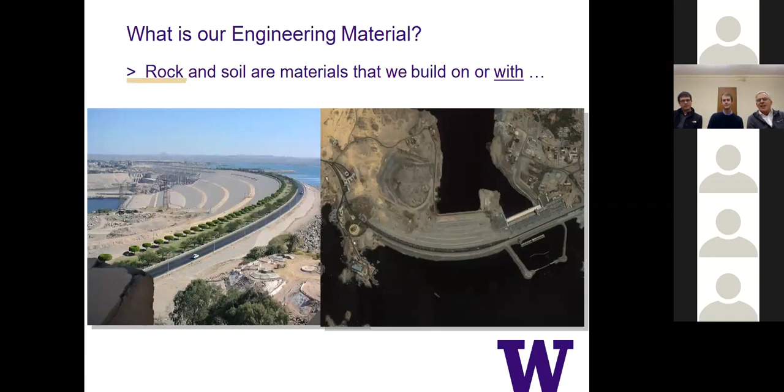So the first thing is to understand what type of material we are dealing with. And the material that we deal with is rock and soils. And these are materials we build on or we build with. So here you're seeing a picture of a dam. This is an engineered dam that is made of soil. And that soil has to be engineered. Here you have a top view of the same dam. So you cannot dump the soil there without looking at the properties, checking the engineering properties the same way that you do with concrete design or steel design or wood design. This is just another material that you have to work with.

So we measured a lot of the properties, and actually some of Mike Gomez and Brent Norton, they have a lot of experience getting the strength of the material, the elastic properties, the permeability, the compressibility. So we have a lot of equipment that is used for this purpose. A lot of that is very advanced, and we have them available here at UW.

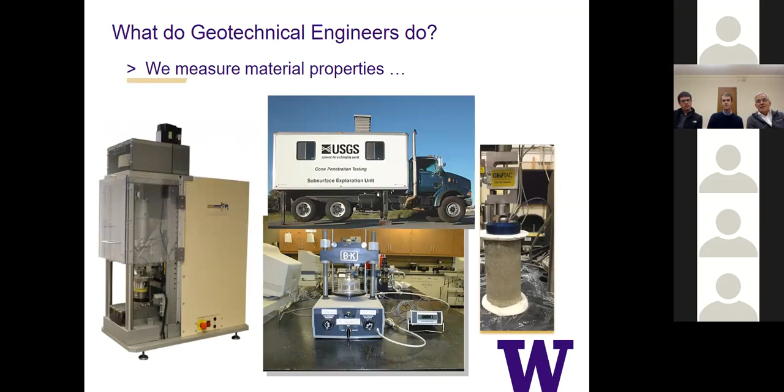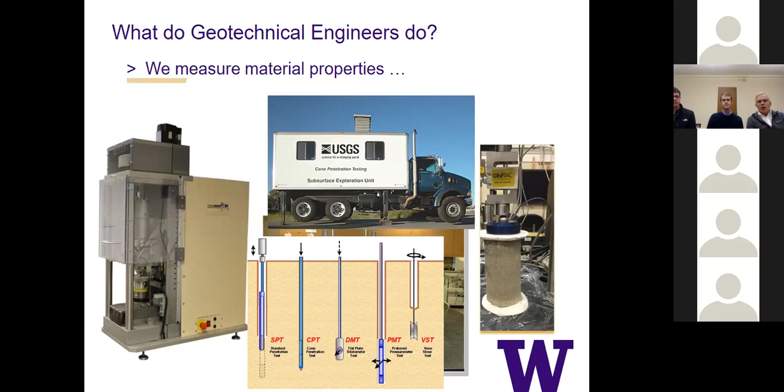Also, you do field tests. Sometimes you cannot bring samples to the lab. So what you do is to go to the field and you perform tests in the field. And there is a whole variety of tests in the field that they run, what is called SPT, dilatometer, cone penetration test, pressuremeter test, vane shear test. A lot of tests that you perform in the field in order to estimate the properties directly there on site. And we have a lot of experience on that too. In particular, Professor Bob Holtz was an expert on some of these methods.

We evaluate the stability of slopes. It's very common to have the need to build a slope or to put a structure on top of a slope, either because visually it's better, you get a better view of the sound, or sometimes because you are making a cut and you have to build near some of these very high slopes. So how to evaluate the stability of these? You may have problems.

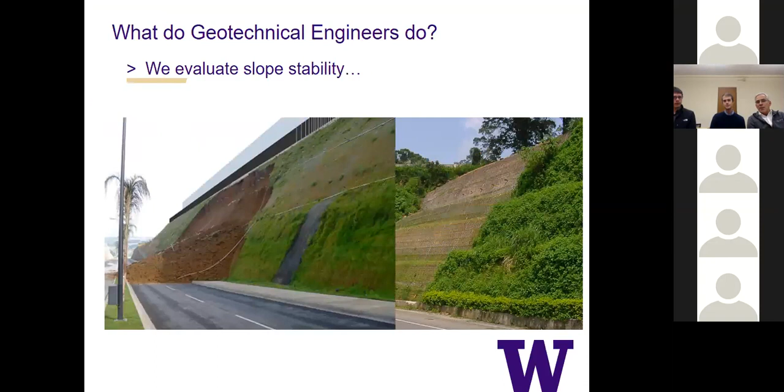Sometimes they are small, but sometimes they are very large, like in the case of the Oso landslide a couple of years ago that resulted in the loss of many lives, in addition to all the economical losses. So how to evaluate these so that we don't have this type of problems is something that we do in our field.

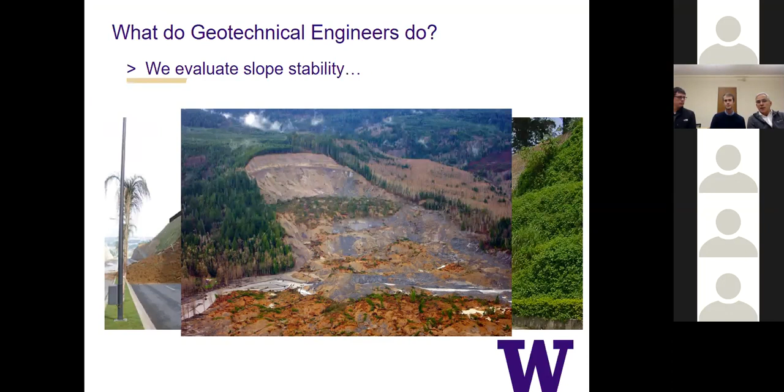What else? We also evaluate hazards, in particular in this area, earthquake hazards. We live on top of a very thin layer of soil, and underneath that layer there is a rock. So waves that come from an earthquake, they propagate through that soil, and usually that little layer of soil acts like a huge amplifier or de-amplifier or modifier of the motion. So it's very important to understand what the soil is going to do to the waves that are traveling there. And that's something that we do.

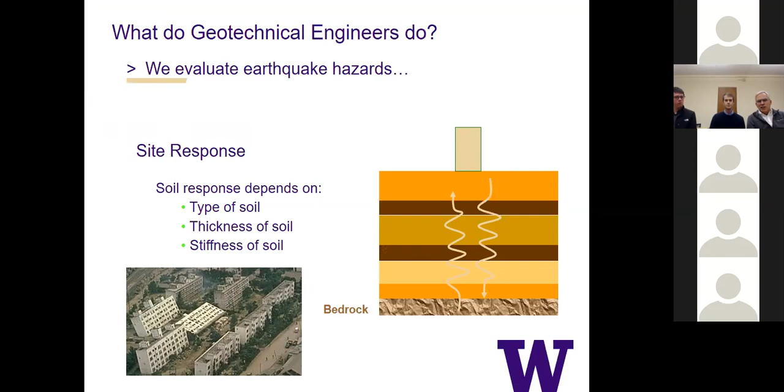So site response depends on the type of soil, the thickness of the soil, the stiffness of the soil. And these are all things that we do. If we don't take care of this, we can have problems like this one, where this seems to be a structural problem, but if you look more in detail at these buildings that are tilted, you will notice that structurally they are in great shape. The problem is that the soil failed beneath them. And because of that, they had to be completely demolished. Fortunately, in this case, there were not many lives lost. This was in Japan, in Niigata, in 1964.

A lot of the things that we do is to conduct reconnaissance activities to learn from recent disasters. And we have had several of those in the last couple of months, actually. So we have people that go to these places, they collect information, and we try to learn from these problems so that these things don't happen again.

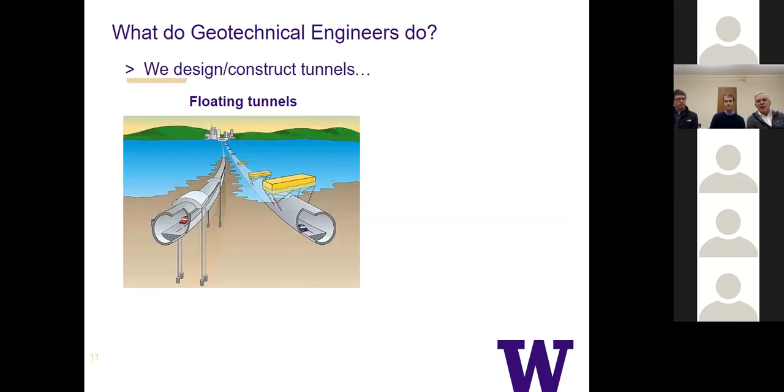But the important thing here is that either the floating bridge or the tunnel has to be restrained at the bottom with some anchors. And that's a geotechnical problem. And that's the difficult part, to make sure that these restraints are in good shape for the next 20 or 30 years.

Tunnels are usually in soils, and actually, I don't know if you know, but one of the first tunnels in soils was built here in Seattle, actually crossing for the I-90 highway when it was getting to Seattle. Since then, we have done a ton of these tunnels in soils. That's the difficult part. How to do that without the soil collapsing on you?

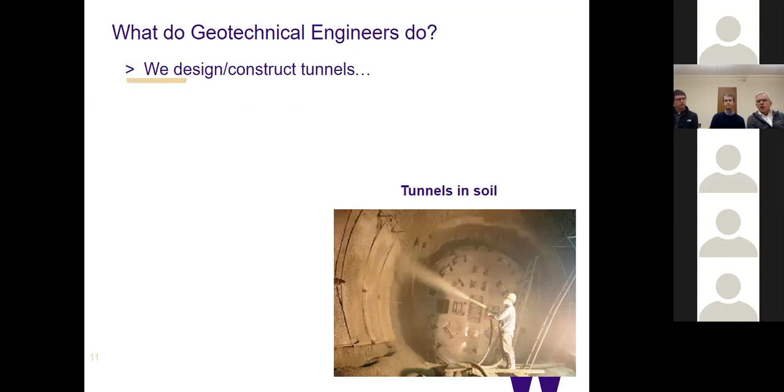And if you go from the 1960s to today, this is a picture of the SR-99. This is Bertha, the TBM machine that was used in order to build the tunnel that's going to be open next year, I think in February. Again, the largest tunnel in soil in the world for the time. It was in 1960, it's again here in 2018. So we do the design of that.

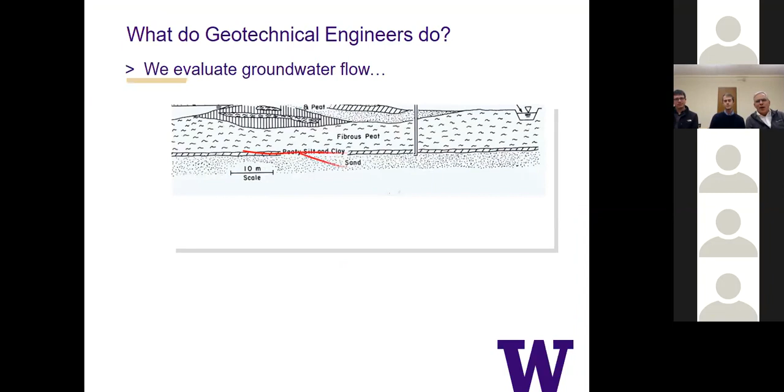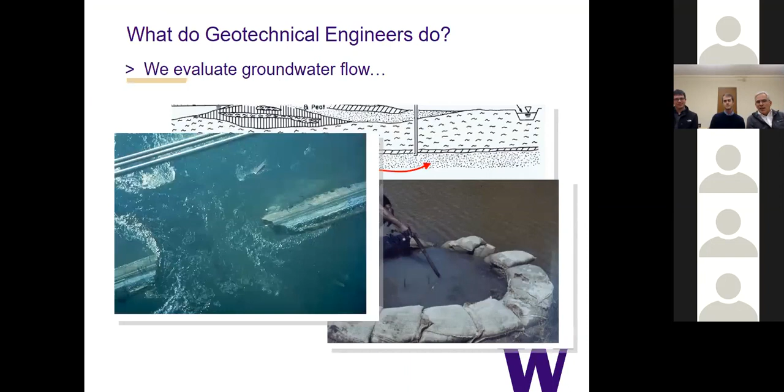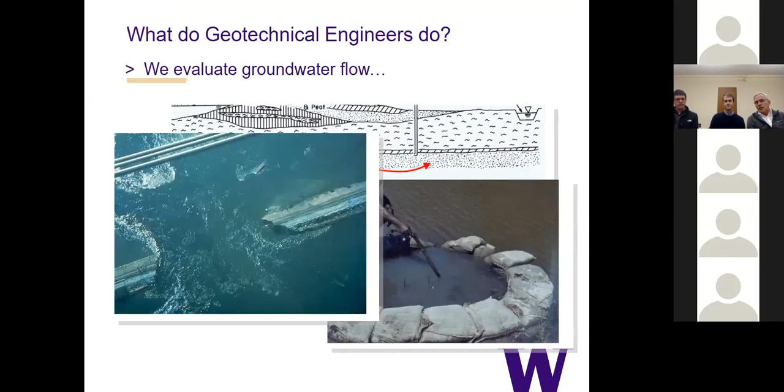We evaluate groundwater flow, how the water flows through soils. And that seems to be kind of like in this picture, like an agricultural problem. But in reality, if you don't take care of how the water flows through the soil, then you may have problems like the breaching of the levees in New Orleans a couple of years ago that resulted in the loss of many lives and economic losses, as you may know.

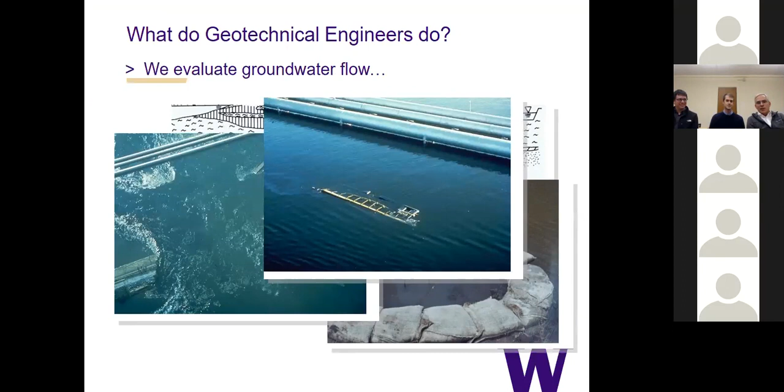Is this a geotechnical problem? It's an interdisciplinary problem between the hydraulics people, the geotechnical people, and the structural people, and social problems, because why do we put these things there? Do we need to put a city in a place that is underneath the water? So it's a very interdisciplinary problem where we all play an important role, including geotechnical engineering.

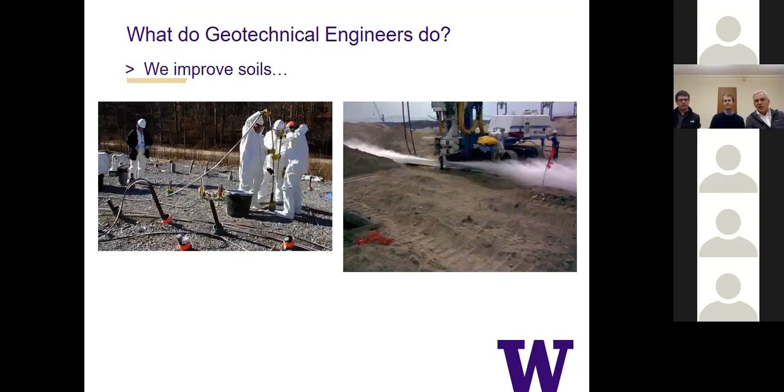And actually, next to me is Michael Gomez. He's an expert on that, and that's why we are very happy to have him here in the group. This is soil mixing. Soil mixing, so you mix cement with the soil cuttings and you end up with a slurry that is much stronger than just having the soil there.

And this one, what would you want to say with this one? The idea is that increasingly we're looking at the impacts of different soil techniques. And recently we've come to realize that we can use chemical and biological reactions in the soil. The new generation of ground improvement is trying to look at how we can use microorganisms or chemical reactions to help us do that.

And one of the things we're looking at is actually using bacteria to do some of this soil improvement for us. So it's an interdisciplinary linkage between geotechnical engineering, microbiology, and also looking now more towards biogeochemistry and these sorts of things. So it's an exciting time.

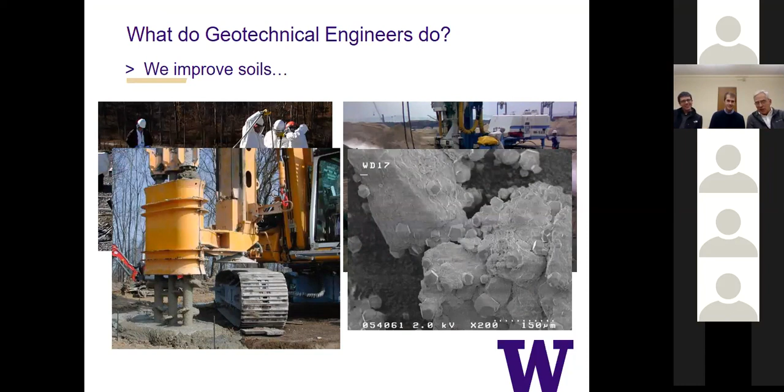Yeah, again, we have to get out of these silos that are just soil mechanics. It becomes interdisciplinary. So we need to do chemistry for this type of problem. We need to do biology here. We need to understand how these bugs grow and move around, how to control them, how to tell them go here or there, poop here or poop there, because that's what they really do. And that's really an interdisciplinary problem. So again, more on the tunneling.

Lately, we have seen several activities related to tunnels. One of those was next here to the light rail, with the tunnels that go to downtown Seattle. Next year, we are going to open another part of the tunnel that goes all the way to the north. We are crossing also to the east side. So we are going to see tunneling much more in the next couple of years.

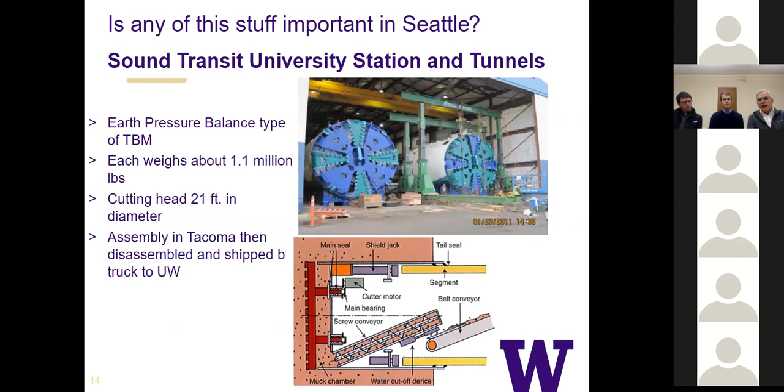And the technology that we use for tunneling is complex. It involves understanding a lot how the soil that you are cutting behaves, in addition to understanding everything else. It's a structural problem too, and it's a construction management problem too.

And this is a picture from a couple of years ago for the tunnel in the light rail station here at UW, next to the Husky Stadium. And that's how the construction site used to look. Now everything is covered, you don't see anything, but below there is a big hole that needed to be done in order to build this.

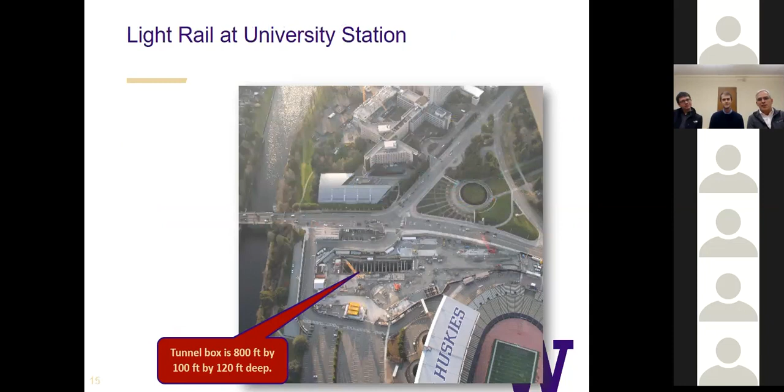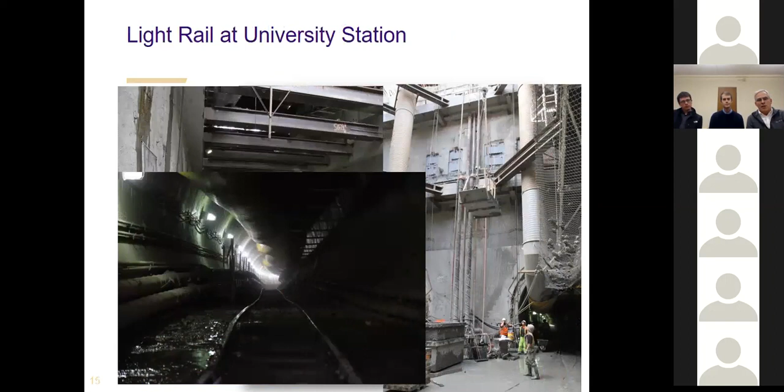This is another picture of the same construction site for the UW station. Here you see the walls on that excavation. These walls had to be heavily reinforced so that the soil doesn't collapse on top of you. And believe me, the loads that come from the soil are huge, are tremendous. So these are very strong walls. And this is the inside of the tunnel when they were building this with a tunnel boring machine, or TBM as it is known.

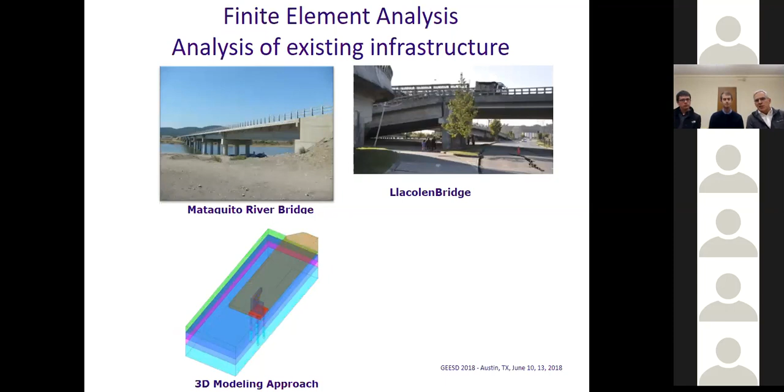We also do a lot of simulations because sometimes we have structures like this bridge, and then we say, well, what would happen if this bridge is subject to an earthquake? We don't know if the earthquake will happen there. So we have to start doing modeling. We do finite element models. And these finite element models are three-dimensional. They include not just the soil, but you have to start modeling the abutments, the embankments, the piles, the interaction between the piles and the soil. So the numerical component of this becomes very heavy. And again, very interdisciplinary between geotech and the structural people and the mechanics people, and of course, all the numerical people.

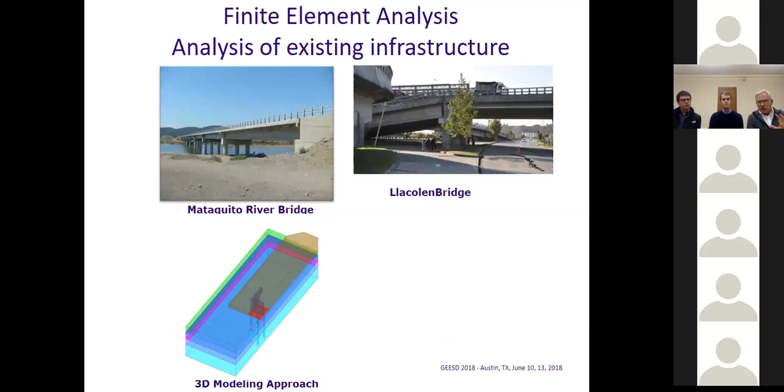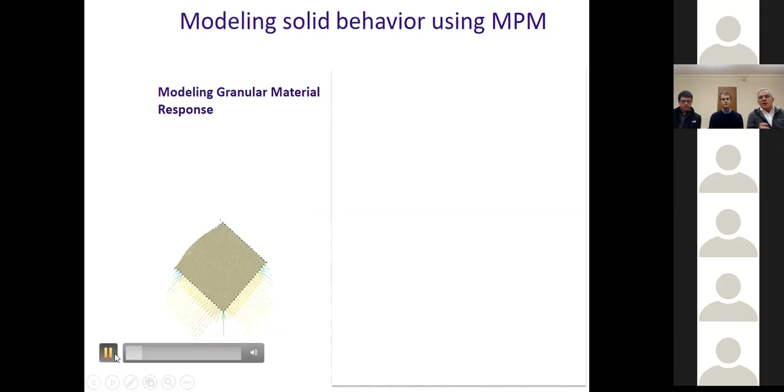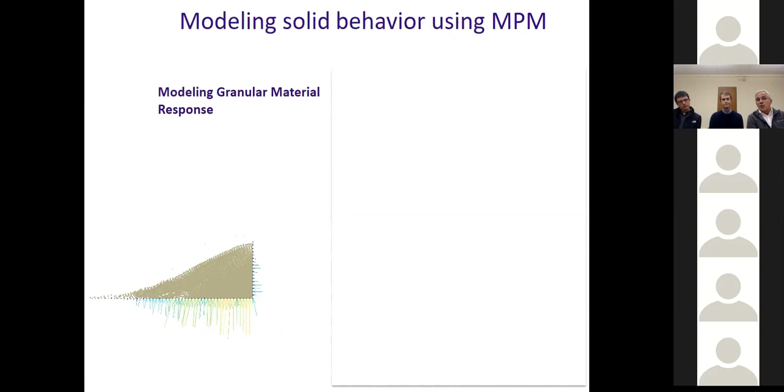This is another case of a bridge in Chile that collapsed. And again, we did the whole analysis of this bridge, including the foundation, the piles, so that we can understand better what happens. So what I'm trying to say is numerical modeling is a very important component of what we do. It can become difficult, for example, when you are doing a very simple analysis of a bucket of soil that you are trying to turn, how to model that the soil is moving like that. This is not a simple analysis, it's numerical analysis, how to do that in the proper way so that you get realistic and accurate numbers.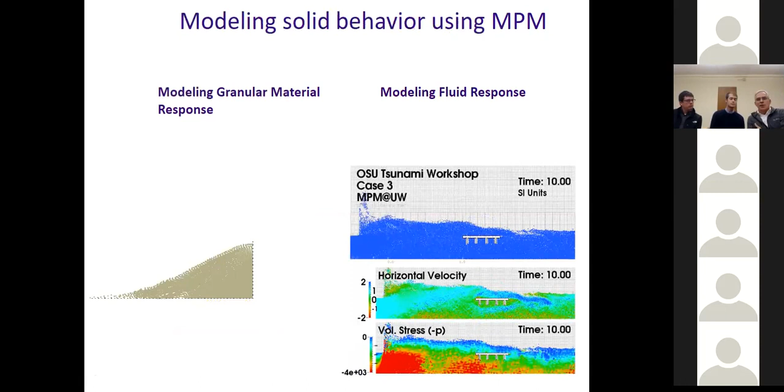So with that, I think that I have given you an overview of what we do. Particularly, I have tried to emphasize all the areas that we do here at the University of Washington, where we have faculty with expertise in that. So with that, I think that now we should move more into our program itself. And I think I will leave that to Brett, so maybe you can go into that. Sure. So that's a very good overview of what geotechnical engineers do.

So how about in Seattle? One of the really great things about being here is that it's really a booming city. Everywhere you look around, there's some kind of construction, some kind of mega engineering project. And so as students, when you're here, you're very much exposed and in contact with all that's going on in Seattle. Maybe you've seen this stat before, that in fact Seattle has more tall tower cranes than any US city.

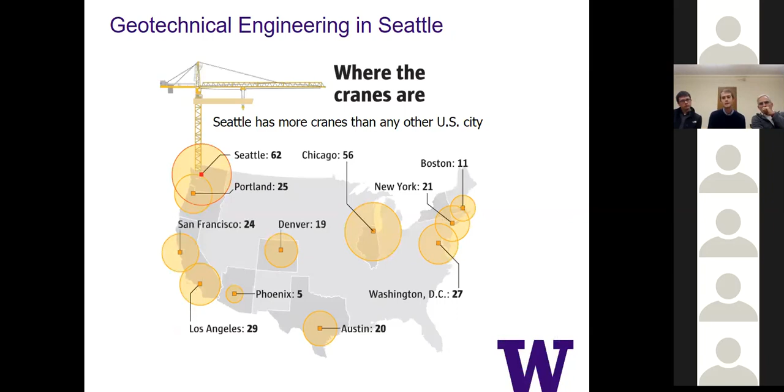But we also have the light rail tunnel, and so the light rail currently serves the university, and in about a year or two, it's going to open north of the university. And so a lot of students who might currently walk to school or take the bus, now they'll just hop on the train, and they'll arrive almost exactly underneath More Hall, where we work.

There's of course lots of really deep excavations, all kinds of activity going on with Amazon. So you might be familiar with what's called the Amazon Spheres in the lower left. And in the lower right is the famous Oso landslide that killed many people. And you may have heard of Oso, but you might not know that it's located just outside of Seattle.

So the point being that when you're here, you're really very much involved with this network of alumni. We have a very active geotechnical scene. Every month we have seminars, guest speakers. There's always some opportunity to interact with practitioners and with alumni. So I think it's a big part of what makes our program really special.

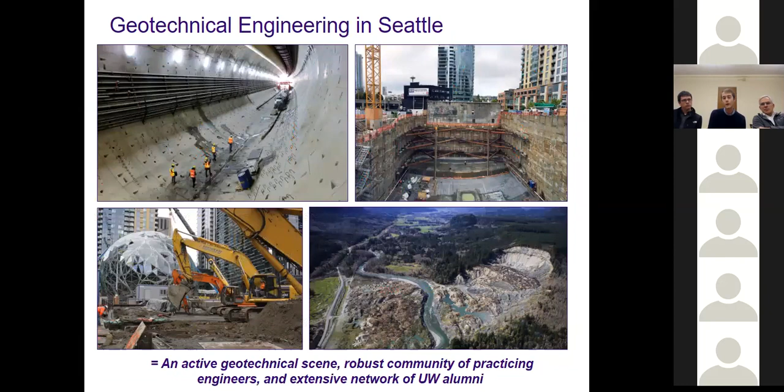So a few details, what does it look like to actually get a master's degree or maybe a PhD? So with the master's degree, you can take two different paths. It's exactly the same degree, it has the same title, but the first option is to do what's called a research master's program. And with that, well, it's what it sounds like. You do research and it results in a thesis.

The other option that's quite popular is called the professional master's program. And with that option, you are strictly doing coursework. It doesn't mean you can't do research. You, for example, could do an independent study for credits. It's just that the research will make up a smaller portion of your overall credits. And then, of course, you could go on to do a PhD.

So a few more details are shown here. So the two master's options, either option, you need 42 credits total to graduate. With the research option, you would typically do 9 credits of research. So you write a thesis and that would count for 9 credits, and the other 33 would come from coursework. With the professional track, again, 42 credits, but it's all coursework. So obviously that's a few more classes, probably 3 more classes.

If you're interested in doing a PhD, that is a total of 90 credits. And importantly, you get to count 30 of your master's degree credits. So it's not as many credits as it might sound, because once you've done a master's degree, in fact, it means only taking another 1 year of coursework. And the rest of the PhD, it's of course all about research.

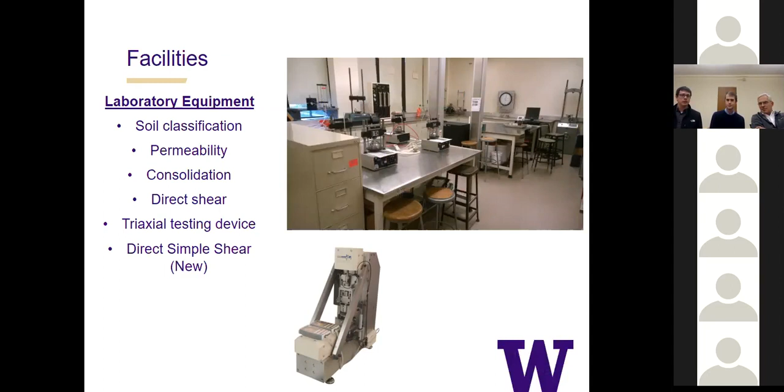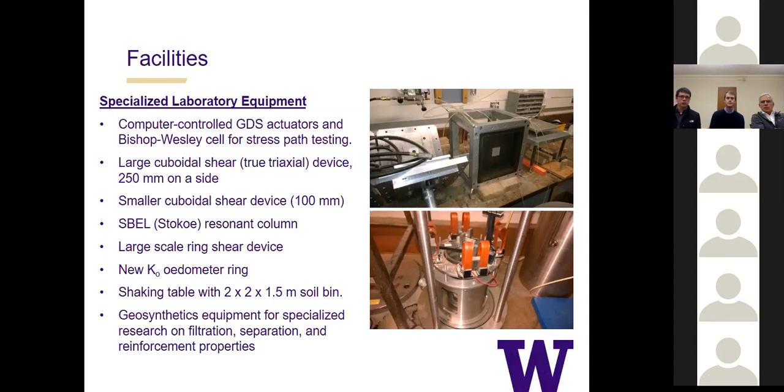There's a variety of equipment from Professor Holtz that was looking at geosynthetics, and a couple of exciting and unique pieces of equipment like this K-naught oedometer ring, where you can look at interesting problems that are geoenvironmental or maybe geotechnical in origin as well. Let's see, whoops, I might have passed that one up.

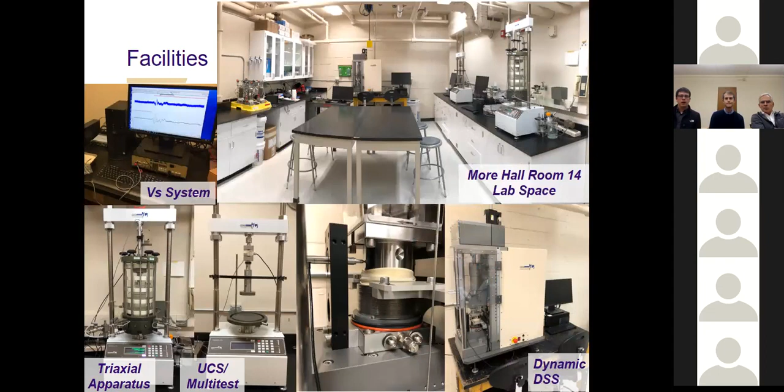This is looking at some of the newer facilities downstairs, which we have for geotechnical research. And so we have some new equipment from GDS, which has a new triaxial device, new abilities to do consolidation tests and unconfined compression, as well as a dynamic direct simple shear, which can start to look at loadings that would be potentially important for earthquake engineering applications.

So we're looking specifically right now at characterizing biocemented materials, but certainly these things are available for graduate research and for your learning, to learn how to do geotechnical lab characterization and to learn about the response of these different types of materials when subjected to loadings characteristic of different applications. And so that's available there as well.

This is a slide plugging the new RAPID NHERI facility, which is headed by Professor Wartman. This is looking at natural hazards reconnaissance. And so there's a variety of different equipment, be it drones or LiDAR, there's even dynamic cone. But the idea is to be able to go to locations that have had natural disasters and collect perishable data in order to understand why things happen and potentially to improve design in the future.

And so this is a really exciting facility in the natural hazards community, and it actually serves the entire United States. And it is part of a bigger network looking at maybe centrifuges or geophysical testing and this sort of thing.

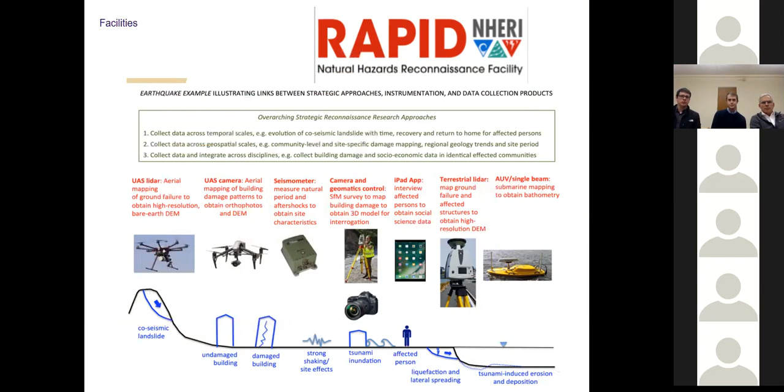And so researchers from around the country can work with Professor Wartman and his team at the RAPID facility, deploying these different things and going to places like Indonesia and Japan, where they've had recent disasters, being able to collect that data and then try to make sense of it and improve how we do geotechnical engineering specifically for different hazards.

And so this is just kind of our overview of the geotechnical faculty. We've got 3 of us here, and over on the far left of the screen as well there's also Professor Wartman, Professor Kramer, and Professor Holtz. And I think now this is going to lead us into talking about some of our individual research interests. And we are going to go very quickly on this.

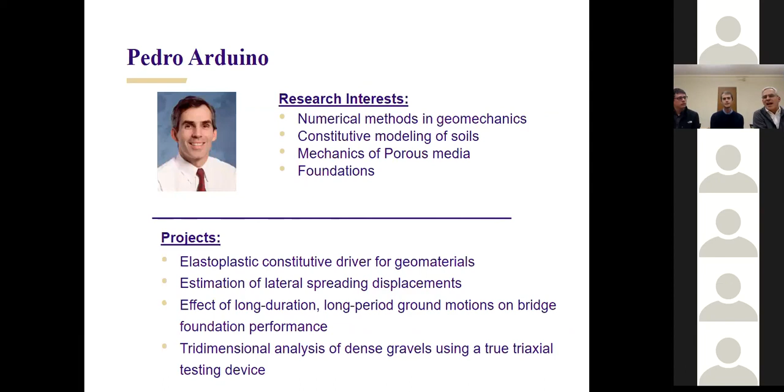And I do a lot of what is called computational geomechanics. So I'm really interested in the numerical methods applied to geotechnical problems. I do constitutive modeling, mechanics of porous media, soil foundation interaction, large deformation problems due to, for example, big landslides or even tsunamis. So it's all related to the computational geomechanics aspects of the field.

And so this is a new field that's being formed. There's an engineering research center associated that we're linked up with too. And it's looking at how we can use these things that nature has already done for perhaps hundreds or thousands of years, and try to apply them to geotechnical problems. I'm specifically looking at biocementation for ground improvement. I'm interested in a lot of different advanced soil characterizations.

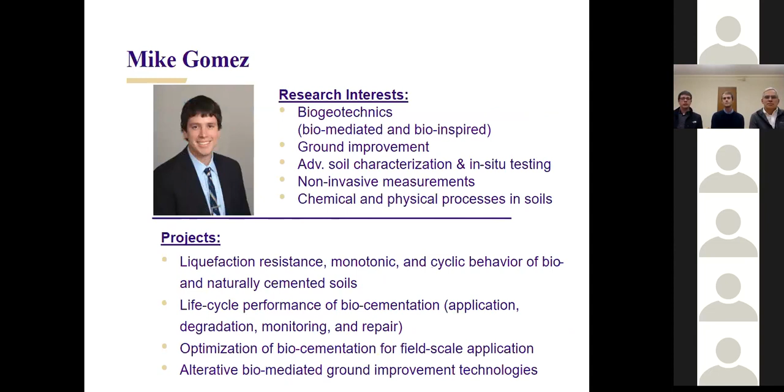And a lot of my research has to do with looking at these biogeotechnical solutions, and specifically biomediated solutions, and applying them to things like how does the biocementation degrade, what is the response of these different types of materials, and how can we come up with new ways of using these mechanisms for our engineering purposes.

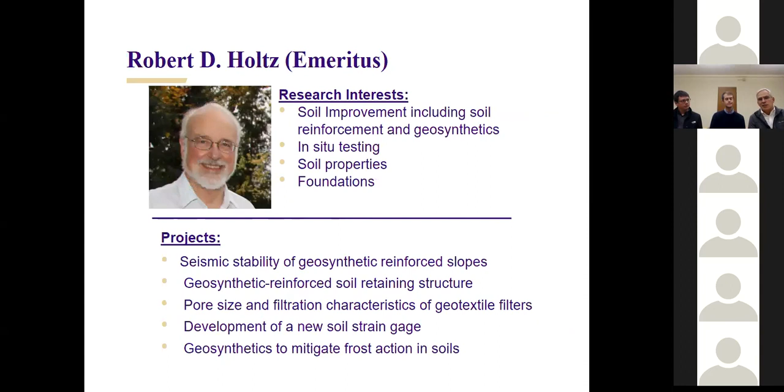I also study something called paleoseismology, and the basic idea there is there are a number of places in the US and around the world where we know we have a big earthquake hazard, but we don't really know much about the earthquakes. So for example, in Missouri in 1811 and 1812, we had what may have been the biggest earthquake in recent history in the United States. But other than the fact that there was an earthquake, we don't know very much about it.